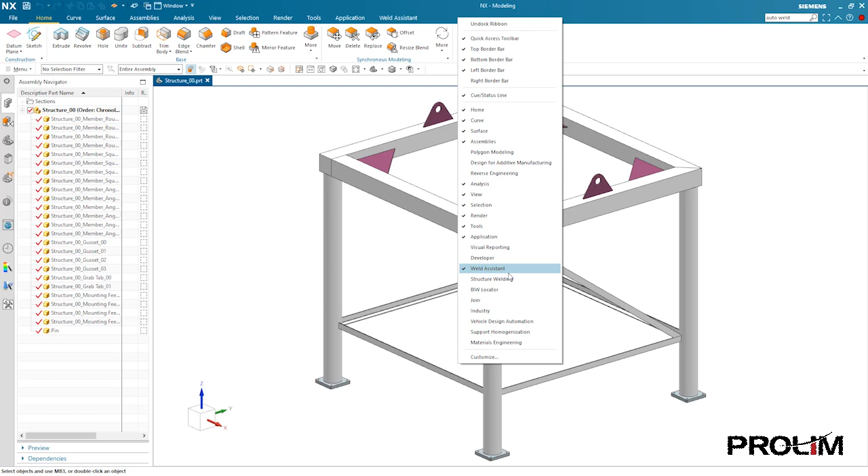Now, for the Weld Assistant tab here, you might need to enable this if you come into NX Modeling and you have this functionality. If you come up here to your ribbon bar and just right-click, you'll see down here I have Weld Assistant checked. You'll just have to make sure this is checked in order for this tab to be enabled, so you have access to those tools on your ribbon bar.

Now, if I go into the Weld Assistant tab, you can see all the different tools associated with the Weld Assistant. We're going to be mainly focusing on these solid welding commands. We're not going to be touching much of the other commands in here—we're going to focus on these, and then the PMI and the information that comes along with those welds being brought into the drafting side. Now we're going to be starting off with the groove weld.

Inside this command, we have several different types of groove welds that we can create. I want to go through the list of the different options for those. So there's the square butt, the V groove, the bevel groove, the U groove, J groove, flared V groove, and flared bevel groove. These are the different types of welds you can create.

Now with each of these welds, they have a different cross-section, and that's the difference between them. If I come down to my cross-section group on this command and expand that, it'll show me the cross-section that I have selected. In this case, I have the square butt, and it gives me the associated dimensions with that type of groove weld.

So if I were to change this to U groove, the dimensions change accordingly. I can control those dimensions, and then it labels it so I know which dimension is associated with what. For instance, I know that R1 is associated with the radius here, A1 is associated with the angle here, S1 is the depth, and then I also have my root opening.

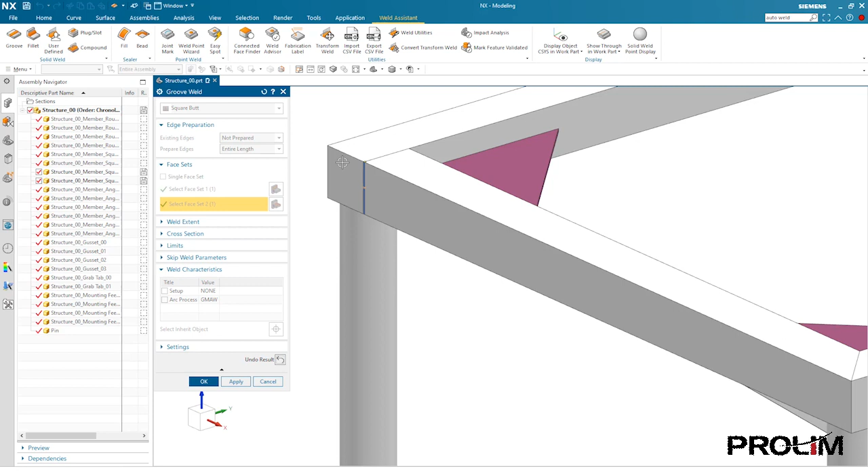Face sets, this is where you select your faces. In this instance, I'm just going to be selecting this face here and this face here. We'll come back to that. If I just go ahead and hit show result though, you'll see that it previews the result for that square butt groove weld. Go ahead and undo that.

We also have options for weld extent, so you can select the edge sets that you want the weld to go across. So if there's multiple edges the weld's going to be existing through, you can control that.

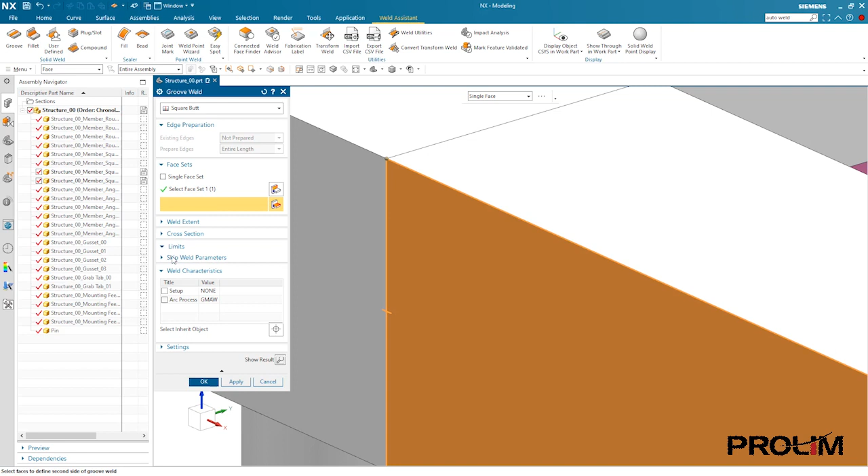You can control the limits. So say for instance with this groove weld, if I only wanted to exist on the top half of this weld, I can control these 2 points here and have it set to only be this distance of the weld. That is also an option if you want to control the specific length of a weld along an edge. You can control those manually by dragging the blue control points, or you can specify values in your actual dialog box.

We have our skip weld parameters, which we'll get more into when we're working with the fillet welds, and I'll talk more about those specifically then, but they are available. And then the weld characteristics that you can add if you would like, such as the setup or arc process if you wanted to.

These settings are all available within the groove weld, and you'll see some similarities between the groove weld and the fillet weld when we get into that.

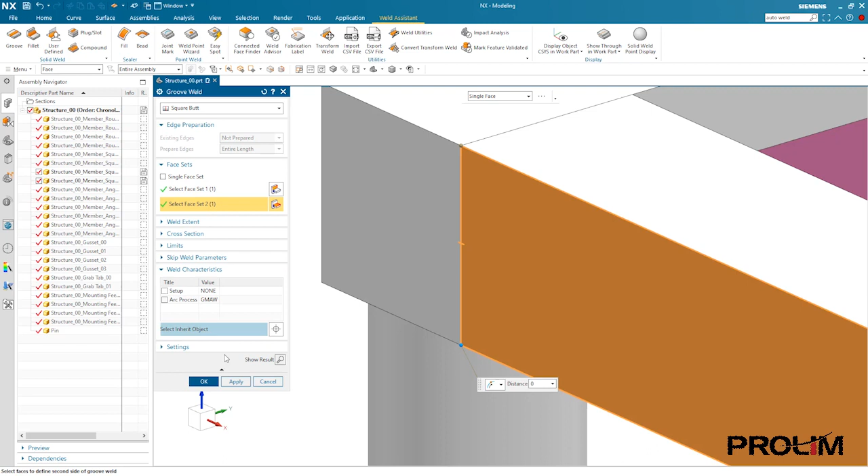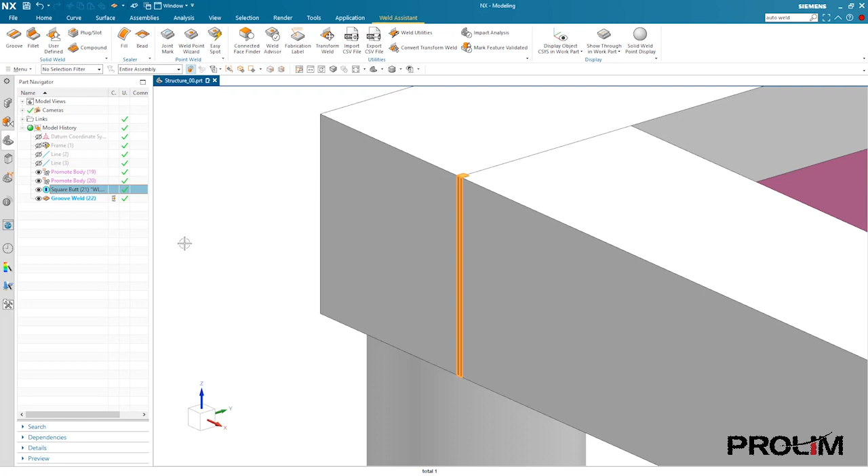Now I want to confirm my groove weld, and you'll see it creates that weld for me in my model. If I come over to my part navigator, you'll notice it did a promote body for these two bodies here. It promoted them so it could create the square butt using the two faces of those bodies. It also has the groove weld listed here, where it has both bodies selected as well as the square butt weld, all inside of one piece.

That's the gist of the groove weld. I just wanted to give you a brief overview of it. Now I'm going to go over the fillet weld.

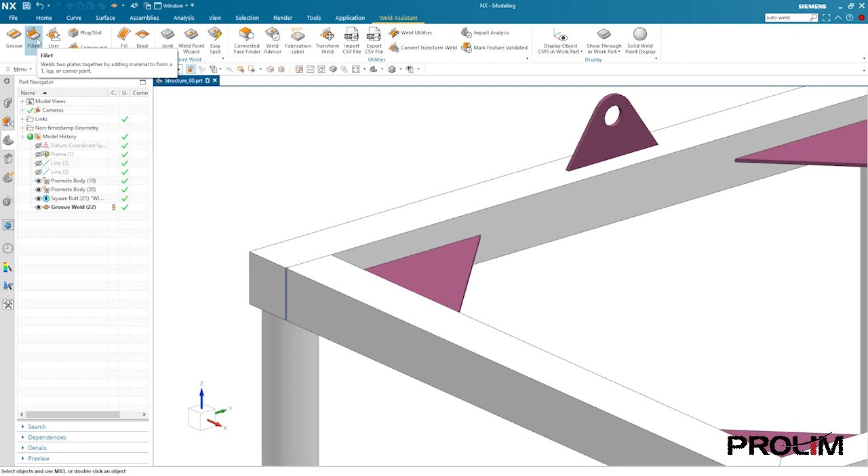With the fillet weld, you're going to see some similar options to what you saw with the groove weld. For instance, the cross section is going to look really similar. Now for the fillet weld, we don't have these different weld options to choose from, so our cross section isn't going to change that much. But if you wanted to change the contour of your weld, you can.

So for convex or concave versus flush, you can control that. And again, you have the ability to modify that dimension on the contour height, depending on how you want that set. Otherwise, you just have to control the leg length of each of the fillet. So I'm going to leave that set to none.

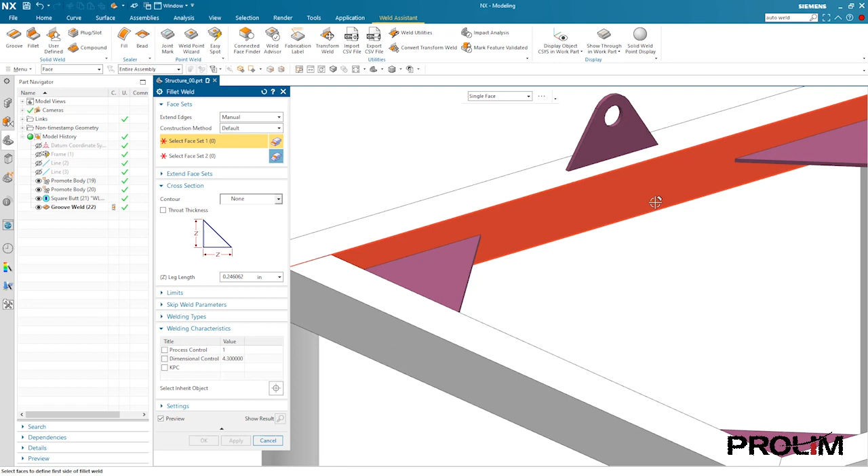Then I'm going to go over here and select some faces for my fillet weld. I'm going to select this face and this face for my first set. And then for my second set, I want to select these three faces of this gusset here.

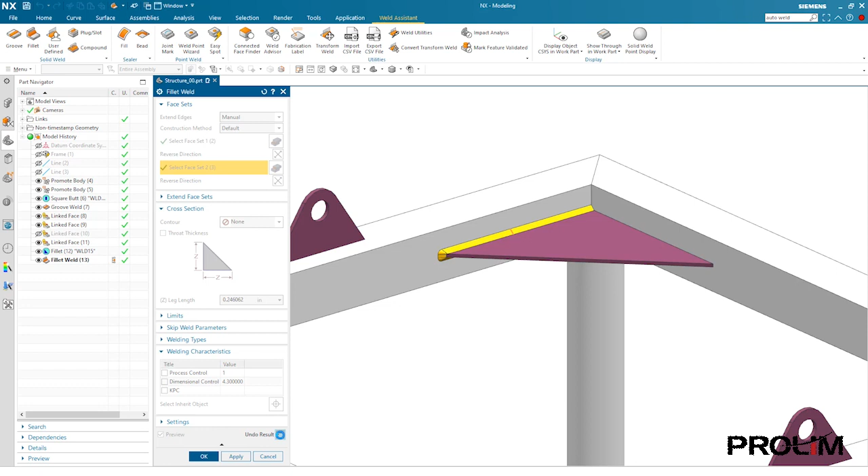Now there's something I want to mention with the fillet weld. This is something that tripped me up when I first started using the Weld Assistant. If I go ahead and hit Show Result, what's going to happen is it only recognizes that one intersection, based on which face I selected first. So since I selected this face first, it's making an informed decision on which face intersection I want to use for the fillet weld.

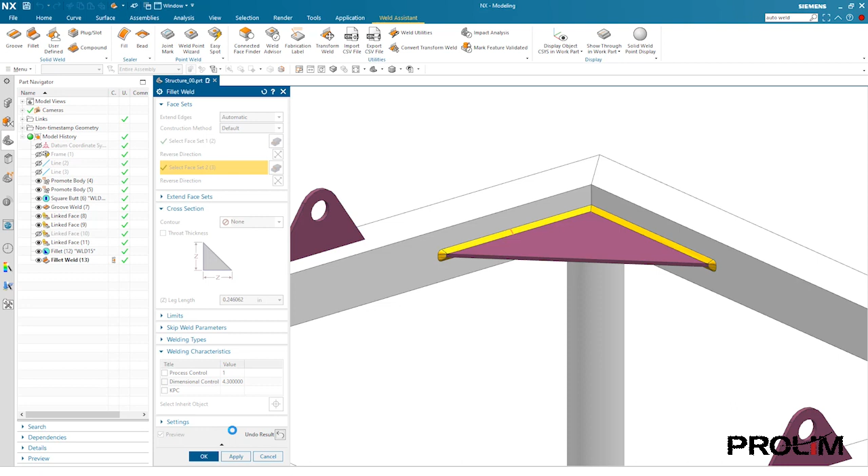That's because of the setting up here, this extend edges, which is set to manual by default. But in order for it to automatically recognize the different intersections between the faces, I need to change that setting to automatic. So if I undo, set this to automatic, hit show result, it'll recognize those intersections and create that fillet weld all around that edge, the intersection between the gusset and the body of the structure. That's just something that tripped me up when I first started, so I'd like to mention that.

Now again, you have access to your limits, similar to—or exactly the same as—how with the groove weld, you can control along the edge how far along that edge you want that fillet to go. You have your skip weld parameters, which I'll cover here in a second, and then the same welding types. Now I'm going to confirm this,

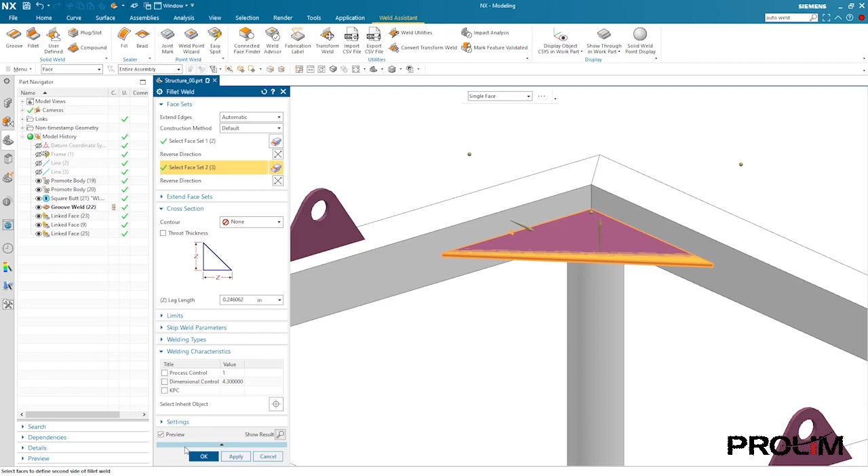and it'll create my fillet weld. Now I want to show you skip welds.

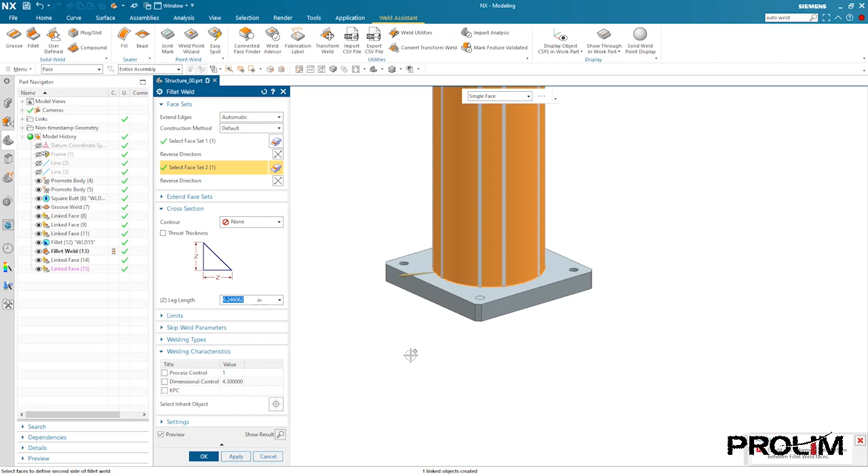So if I come down here to my cylindrical leg and then my base plate, I'm going to create a fillet weld, selecting that cylindrical face and the top face of that base plate.

Once I have those selected, I want to come down here to skip weld. I want to check the box to create skip welds here. And it gives me some more options available for how I want to define my skip weld.

Now the way you define it is based off of three key parameters: the number of welds, the segment length, and the spacing between each weld. You choose two of those, and then you define your skip weld based on those two.

This instance, I'm going to leave mine as number and length, and I'm going to leave my segment length as is. I'm just going to change this to a 5, just to get a couple more welds along that cylindrical face. I'm going to go ahead and confirm that.

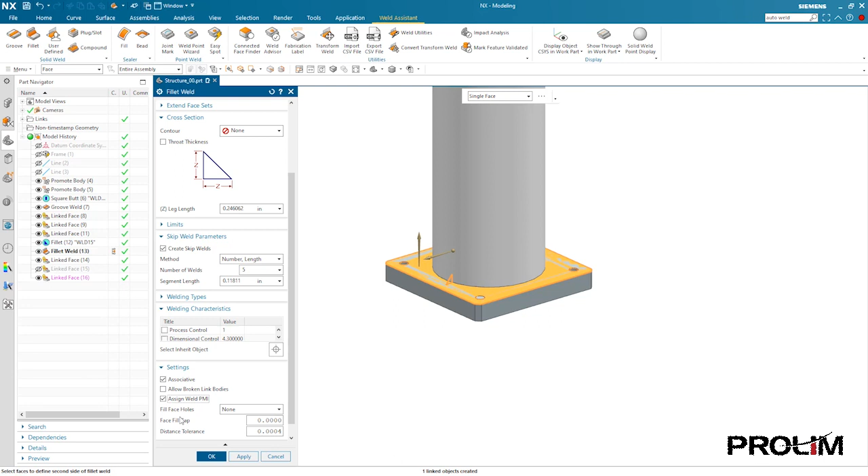Oh wait, I want to mention one other thing with this one. If I come down here into my settings and check this box for assign weld PMI, this is me telling NX I want to assign PMI to this specific weld, and it's going to prompt me when I hit OK.

So once I hit OK, it'll create my welds, and then it opens up a new window. It opens up the weld symbol window, and it prompts me to create a weld symbol. I'm going to go ahead and click out here in space to reposition my weld symbol.

You can notice that it already has the weld information associated with the weld I just created populated for this new symbol. And then I have the ability to come in and modify the different characteristics of the weld symbol depending on how I want it set, or the standards of my company and how they like to have everything set up. So you have control of that.

And this is the typical weld symbol window. So if you wanted to create a weld symbol within drafting, you're going to see something similar to this. Now I'm going to go ahead and set this to standard solid. I think that's all I want to change for this.

But I have the ability to come in and change whether or not I want it to be a fork or a box. If I wanted to change it for whatever reason, for a fillet, K-groove, this is where you can control that information. So if I wanted to create a weld from scratch, where I'm not pulling that information in for PMI, I can choose that information as I go.

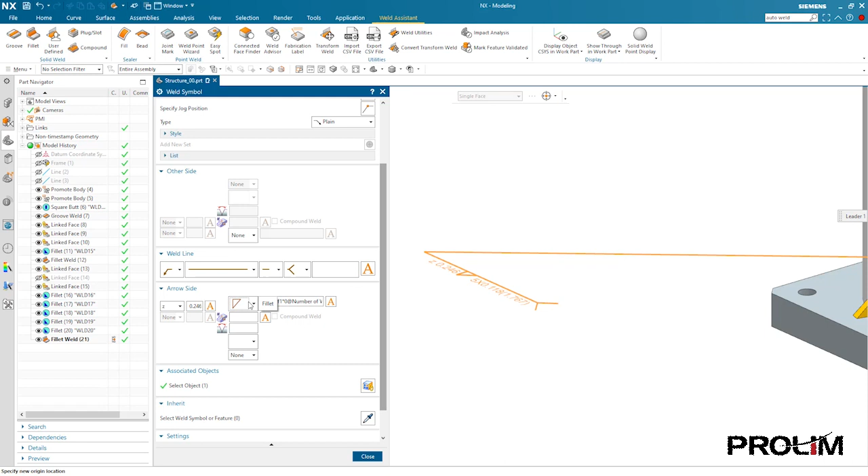But in this instance, it automatically grabs all that for you because I have a specific weld that I am referencing for this weld symbol, and it pulls that information into the weld symbol for me. So it just saves me a lot of work. I'm going to go ahead and just hit close. And you'll notice that weld symbol stays behind, and then I have that PMI left in the 3-dimensional model to reference for my weld symbol.

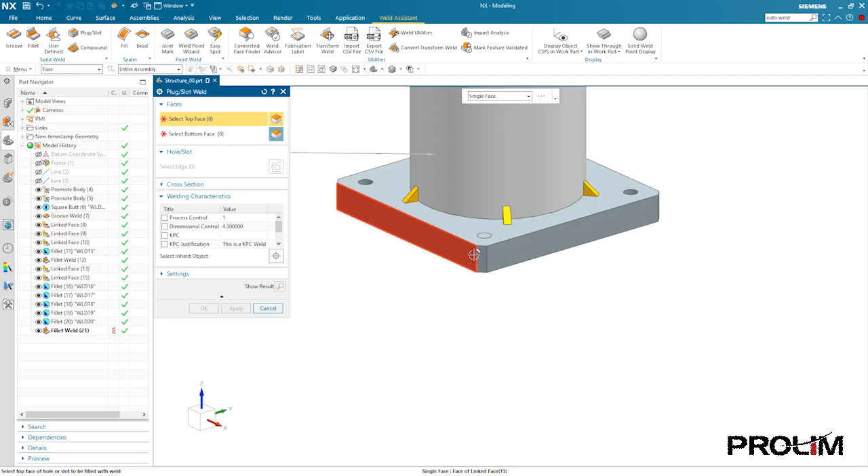Now, the last thing we're going to look at with the solid welding tools is the plug and slot command. What this command allows us to do is, in instances where we have gaps between our components, such as here, where I have a pin inserted into my base plate, I have this gap left over because the pin isn't quite the same length as the base plate.

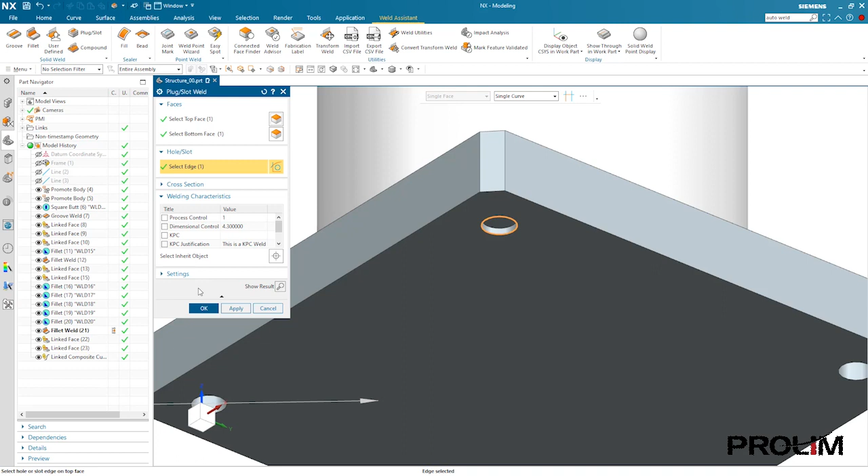What I can do is select these faces. I'll select the top face being the bottom face of the base plate, the bottom face being the bottom face of the pin, and then I specify my edge as the circle at the bottom of the base plate, defining where I want the plug to end. So I'll go ahead and hit OK, and it'll fill that gap.

You might have noticed within the plug and slot command, I didn't go through them as much as the other ones, but there is another cross-section option, so if you wanted to turn on contour, you can here as well. But that's the plug and slot command. I just like to mention its availability is there if you ever need it for filling up holes or things like that with the solid welding.

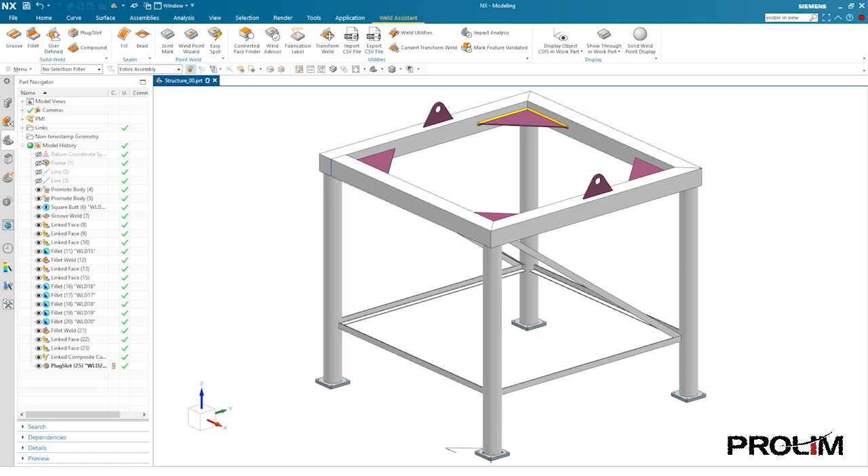Now with that, we're finished with what we're going to cover in terms of the solid welding weld assistant group. So now what we're going to be doing is taking a look at the drafting side. Now there's something I do want to mention before we move over to drafting.

The PMI that I placed previously exists inside of my trimetric view. And this comes into play when we're adding the base view to pull in that PMI information.

But I just want to make a quick note of that before we swap on over. So this PMI exists in the trimetric view, and then we're going to go through some of the settings on how you place that PMI within your base views.

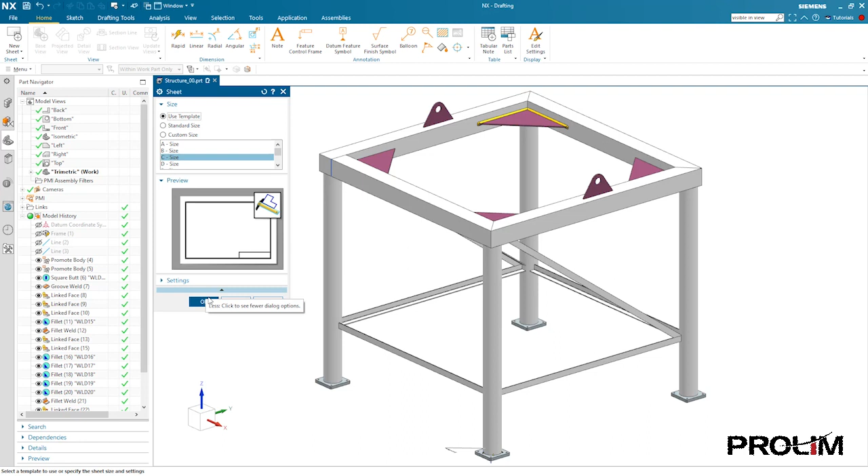So I'll go ahead and swap over to drafting. It's going to prompt me for a sheet size, I'm just going to leave it as C. Then it prompts me for my base view. Now, what we can do is change the scale down to 1/8. In terms of PMI, bringing in that fillet weld PMI that I've already created, I want to bring that in when I create this view.

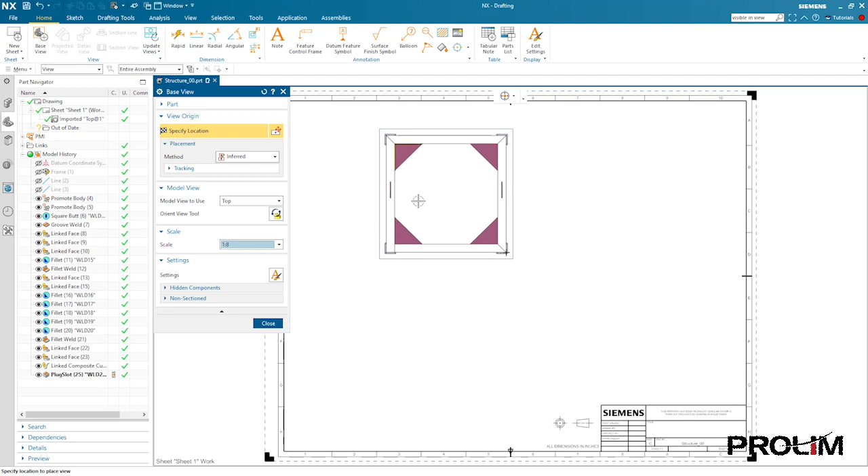If I come down here into settings, under common, I have a PMI group for my PMI settings, and I can choose how I want my PMI inherited. Now there are 4 options in here: none, from model view, aligned to drawing view, view only, and aligned to drawing entire part.

Now aligned to drawing settings only pulls in PMI that exists on a plane parallel to the drawing view. So this would only work for, say, a top or bottom view because of the way I had the PMI placed in my 3-dimensional assembly.

And then for view only, it makes it so that it only references the PMI that exists in that specific view. So if it was a top view, since my PMI doesn't exist in that top view, it won't actually bring anything in. But if I were to say entire part, then it would bring in the PMI that I've created into the top view as well.

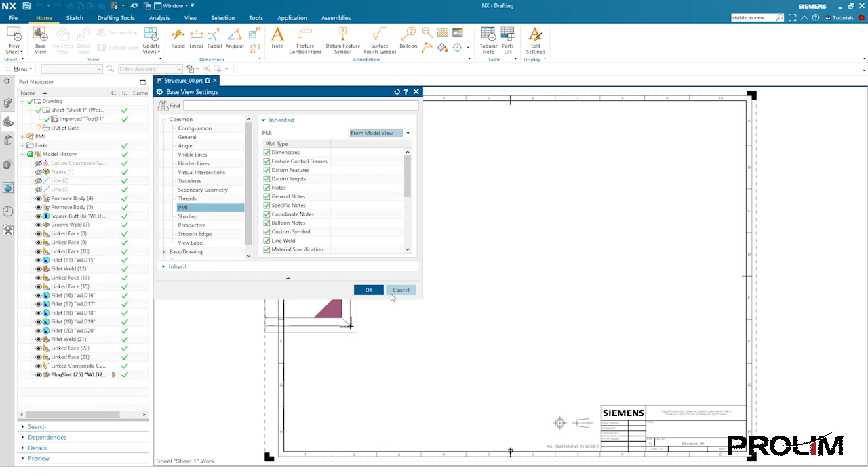So since we're going to be doing a trimetric, I'm going to select from model view and hit OK. I'll change this to trimetric. Make sure that's actually changed. Yes, it is. Didn't know if that reset it. Now when I click to confirm, you'll notice my PMI comes through. It prompts me to create another view, but we don't need that. So we have our PMI that I already created in terms of that fillet weld.

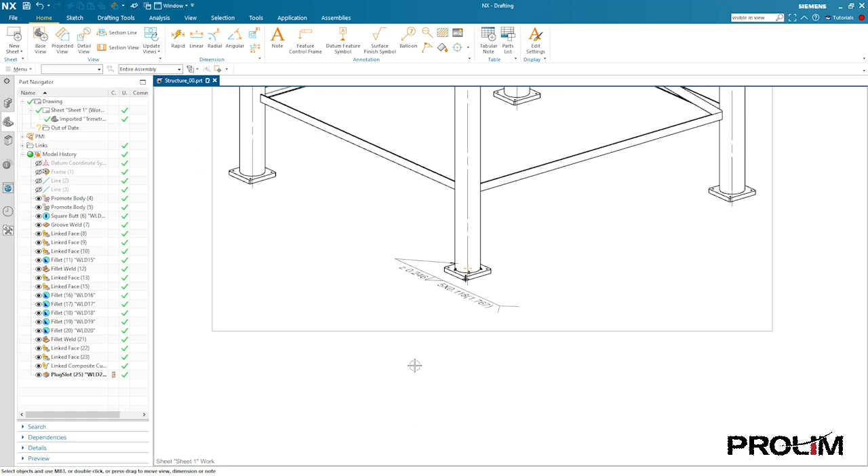Now, if I wanted to manually create a new weld symbol, I can come up here to my weld symbol command and select that as well. This is the same layout as the weld symbol PMI that we were working with in the assembly. It looks exactly the same. This is where you can manually put in that information and choose where you want it placed. So I can specify the location I want the weld symbol placed on, specify the terminating object, and then put in all the information relative to that specific weld.

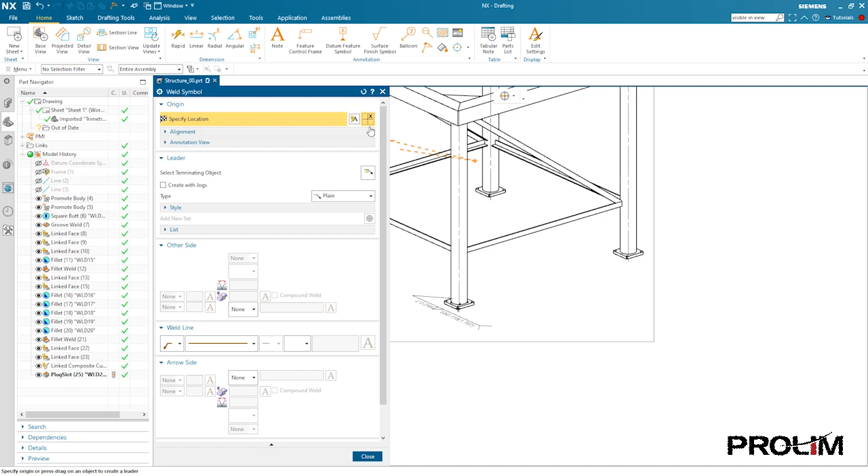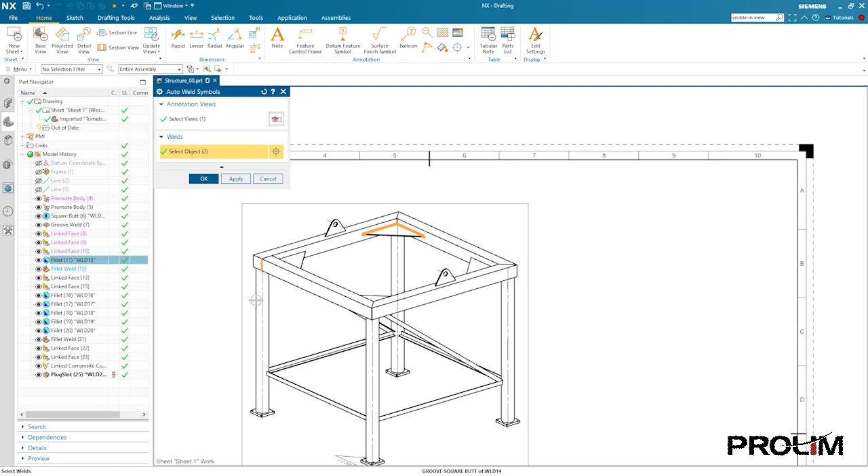Now this is a manual way to do it. There also exists an automatic way. So let's go ahead and go into Menu, Insert, Annotation, and then Auto Weld Symbol. Now I'm going to specify my view, and I'm going to select the weld objects that I want to bring in. So I already have a fillet weld here, and I have a groove weld here. Once I have those selected, I can just hit OK and automatically annotate those weld symbols for me, so I don't have to manually type it all in. It's just a convenient way to create your weld symbols within NX.